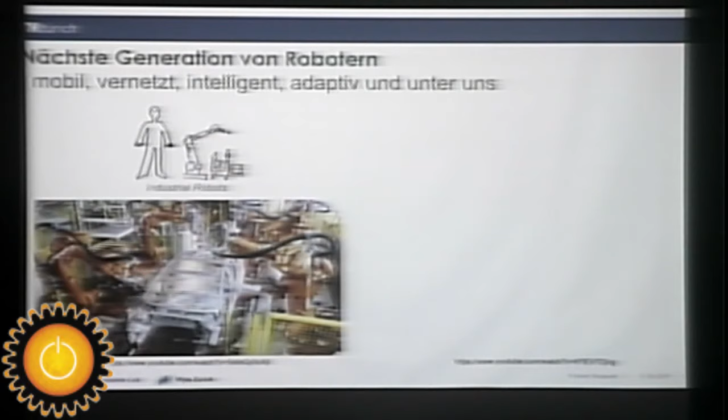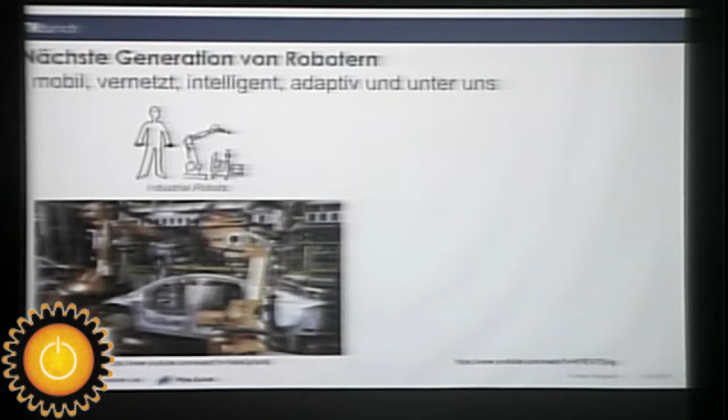So let me first start with a little bit of a historical view. Robots have been around for quite a while. You probably all know the robots which are producing our cars. About 400,000 are installed every year in factories, a lot in car factories, but all other factories too. Meanwhile, about 30% of these robots are installed in China. And they're not installed in China because labor is extremely expensive in China, but because they are much more reliable, much more precise for these types of tasks.

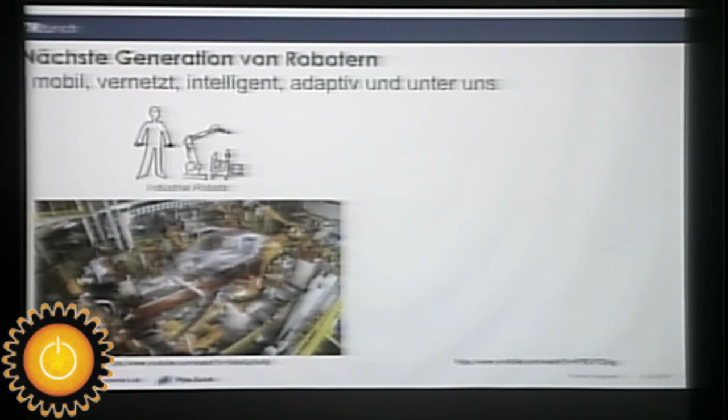Now, you might then ask, why do we not have robots around us? Because there are also some tasks which are not fun to do. But if you look here, these robots are in an environment which is very structured, very precise. It has no humans around, and for this type of task, robots are perfect. But the next type of robots, and these are the robots I will talk about, is this type of robot, which hopefully at one point will clean up our kitchen. But I have to tell you that it's probably not tomorrow. It will take a while.

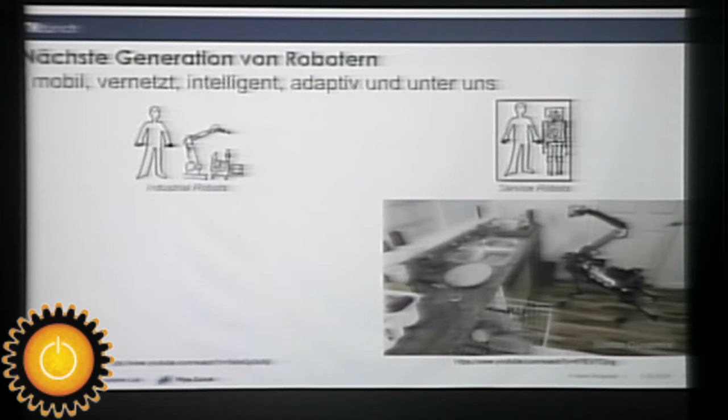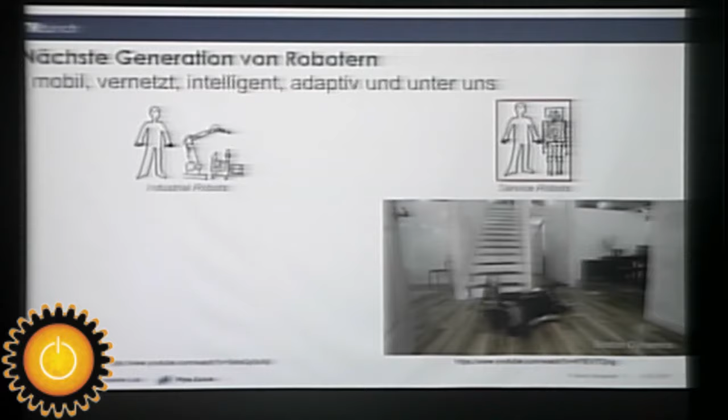Even if this video from Boston Dynamics, which was on YouTube, and probably a lot of you have seen it, looks like we can soon buy this robot, this robot was teleoperated. It was precisely pre-programmed. There is no way today that we have a robot which can really enter a building, and you give it a task, clean up the kitchen, and it will do it. What these robots can do today, of course, is autonomously move around. They can go upstairs, they can get back on their legs, but still they have a lot of limitations.

Now why is it so difficult? It looks like the tasks which are difficult for us, like precisely soldering something or assembling something in a car, are easy for robots. And on the other side, jobs which are easy for us are very difficult for robots. Here's another example of a robot doing some work in a somewhat homemade environment. The video is sped up 50 times. So even at 50 times faster, it doesn't look so fast.

Why is it difficult? Our daily environment is very complex, very diverse, with a lot of surprises. And robots today cannot really deal with surprises. These robots have to deal with uncertainties in their perception, a lot of errors, a lot of noise. They have to deal with partially available information, so that you see only a part of a person's body, for example. They have not only to understand and see the environment, they also have to be able to feel the environment. And this is probably the most lacking sensor. Today's robots have no tactile sensing. We can handle objects very easily because we have a very tactile hand. Robots cannot do this. Even though there has been a lot of research, the progress is very slow on this end.

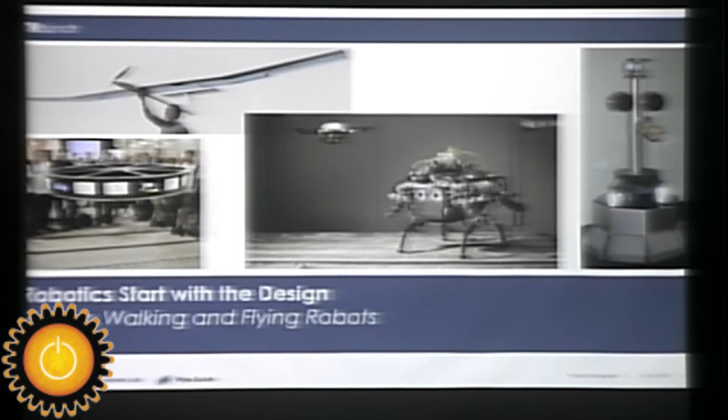So I would like to go through more or less two elements. First, I will speak about designing robots with different examples from our lab. And then I will go over to navigation, how we can actually have robots know where they are so that they can move around in their environment. So let me first start with some example of designing robots. And I would like to start with student projects.

I'm really extremely excited to see so many young people which are really excited about robotics. And we have also a lot of students which are designing robots. And these are two examples. We have much more wonderful examples of students which did in the last year of the bachelor studies a project in a team, typically about 8 to 10 students.

And in this team, they pose a vision themselves. Sometimes we propose something, and then they develop the whole system from scratch up to a functional prototype within 1 year. This is a choice the students can take. They can have a little bit less lectures, and they do more project-based learning. And we have a lot of very interesting collaborations.

We have, for example, collaborations with Disney. Disney has a research center at the campus in Zurich. And so Disney has a lot of different places like Disneyland, it has films and so on, but they have also resorts. They have hotels on the beach. And they came up with the idea, can we build a robot which can actually make drawings on the beach so that people are really excited in the morning if they look towards the beach.

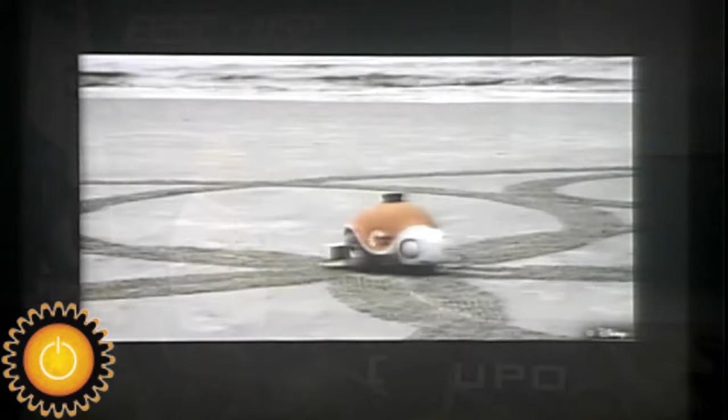And so the students started to build a robot which can actually scratch into the sand. They had to build the entire system, and then they had to actually design the whole navigation, localization so that the robot knows where it is, then also the whole planning. And here, this localization is done by these pillars, which you can just put in as reflectors, which are seen by the laser which is on board the robot.

And then the robot can take an image and then automatically calculates the best trajectory so it doesn't cross too much over its own drawing. And at the end, it can really draw elements, which is probably not extremely complex, but it's really not easy. I think the students learn a lot on one side, and on the other side it's something which is very difficult for humans because robots can move very precisely.

Another task we gave the students: today, with car-like robots with wheels, we can in principle only go on flat ground. If there are little steps, it's already difficult. If big steps, no way. Now the question was, can we actually build a wheeled system which can not only go on ground, but also on the walls and probably on the ceiling?

So what the students built is this little robot, which is probably about 50 centimeters long, which you can see here, which is like a car, has 2 wheels in the back, fixed, and then 2 wheels steered in the front. But these wheels are not actuated, no motors on the wheels. But then they added components from flying robots, so it's 2 propellers. You can see 1 and 2. And these propellers can be tilted in 2 directions.

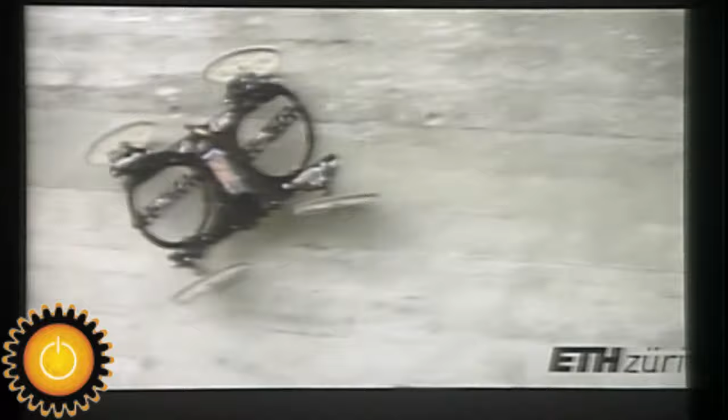And if you put this nicely together, what the students did, you end up with a robot which is on flat ground. There's a wall coming. It just changes the propellers appropriately, and then it continues as it would on the ground. Of course, here you cannot hear the sound.

Of course it's loud. It's like a helicopter. So it's a lot of noise, but it can easily go on walls. This is a student project which was not defined for a specific task. It's just to see, can we drive on walls? Which students showed is possible, and very often then all of a sudden people came.

The civil engineers came to us and said, can we have these robots? We want to do measurements on bridges. And we did some projects in this direction, but later on, we will come back on this, we decided to go with flying robots without wheels towards bridges.

Now, another field where, as an engineer, I think you have to be excited about walking and the mechanism how dogs or humans can walk. And walking, of course, is extremely agile. You can go upstairs, you can go in the mountains, you can go in very rough terrain. And if you see in nature, humans, but also a dog, and this is a jumpy dog, where you can find YouTube videos of this jumpy dog, it's amazing how dynamic, how agile they can walk around or make big jumps.

And so as engineers, we ask ourselves the question in research, can we do something similar? And of course, the first thing you have to try to understand is why nature, humans and animals are so good in jumping and so on. And there is one secret or one element behind it, which is that we are elastic. So we have muscles and tendons, and the tendons are like springs. And this helps a lot, and this can also be done technically.

And what we did is implement this in a motor, which looks like a motor, but it has first a motor, then an encoder, then a spring, a torsional spring in this case, then a second encoder. We have two encoders because then we can measure the deformation of the spring, and then we have the output. And of course there is a reduction gear. In this motor we have a reduction of about 1 to 50.

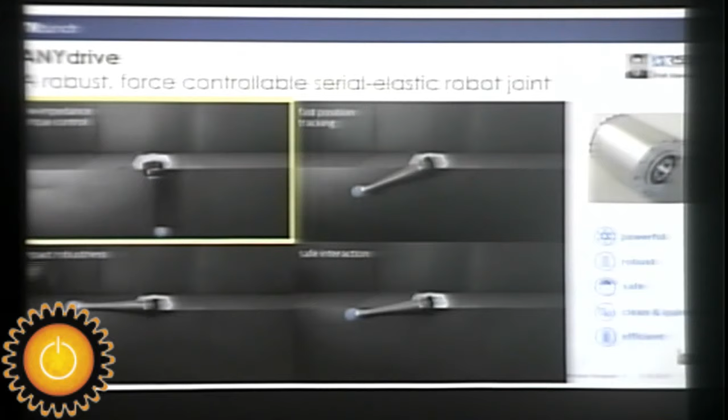And this reduction means that, in principle, if you would like to turn the motor back from the arm, it's really hard to turn it. But because we have a precise measurement and this compliance, we have a system which all of a sudden behaves nearly like a human arm. So first of all, you can see here, because we have a very precise force measurement, the motor behaves like a free pendulum, even with a very strong reduction gear, because you are measuring the force and controlling it to zero torque.

Then the second thing is that, I have to start the video again. Oh, doesn't work. Sorry.

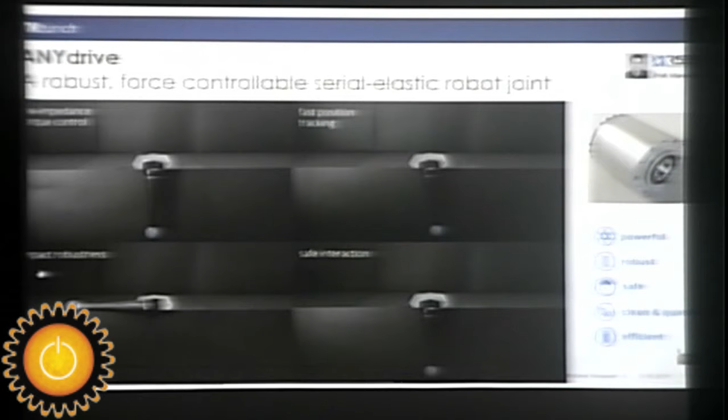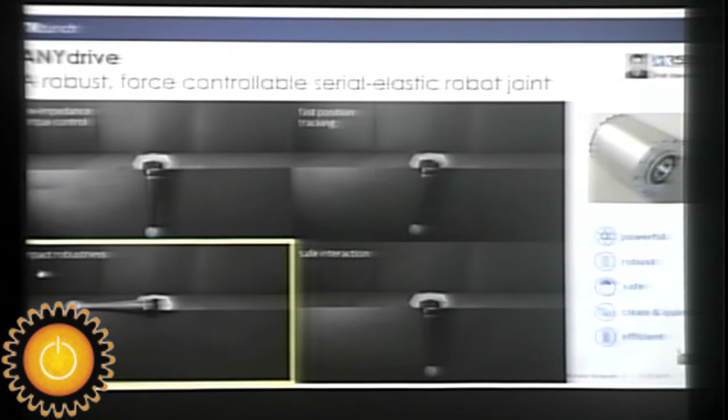So the second element you see, because you have the spring, you can actually hammer on the element, and the gearbox is not destroyed, which would be destroyed if you had no spring in between. Then you can also have safe interaction.

So if a human with your head is interacting with the robot, it will automatically stop. It has a very precise measurement. The spring is already damping or reducing the impact force, so it's really a safe system. And you still can have very precise position tracking, you can still go to a very precise position.

Now, these motors can be used for robot arms, or they can be used for walking robots. If you have, for example, one leg of a walking robot, you can see again, these are motors with high reduction gear, but they behave like zero torque, because you can precisely control the torque.

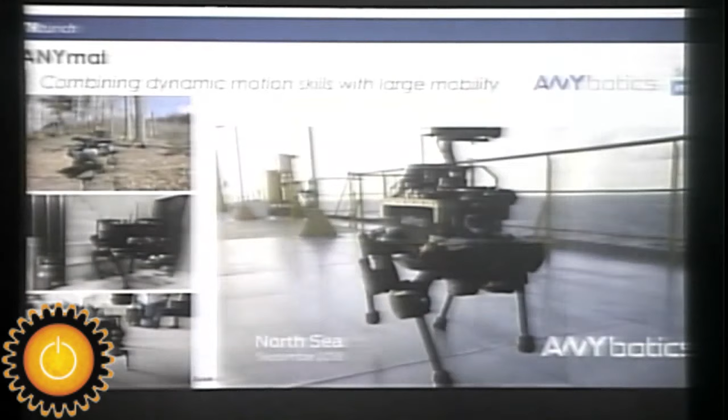Now if you equip a walking robot with four legs, and each leg has 3 motors of this type, you have enough degrees of freedom to move around. You can then very adaptively move around in the terrain, because the legs are compliant, so you adapt to the terrain.

You can also go upstairs and always feel how you're interacting, and even do jumps. This robot is not optimized for jumps—you've probably seen similar robots from Boston Dynamics. You can, of course, optimize the spring so that you can do very high jumps.

This robot was optimized to really do inspection, for example, of environments. Here's an example where the robot is on an oil and gas platform out on the ocean, and the task of this robot is to go and do inspections with its onboard camera.

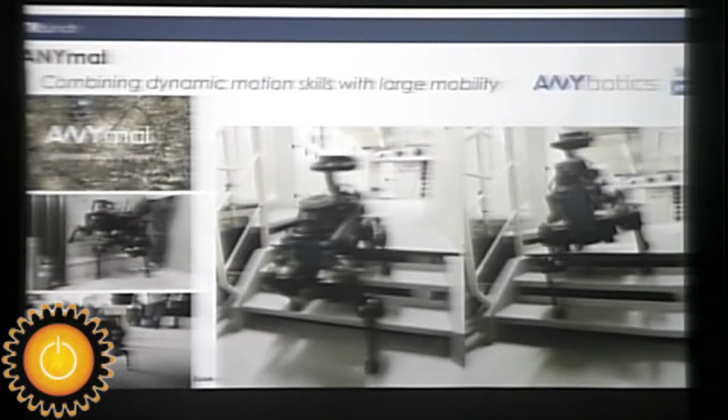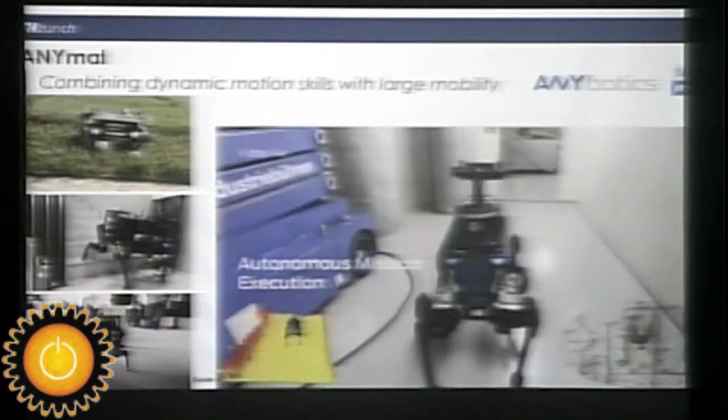A wheeled robot would be limited here because there are stairs and so on. This robot can really move in any environment, adapt to the situation, and do the inspection and create a 3D map of the environment, for example. So these types of robots have a new application field, because they can reach areas where you cannot reach with regular wheeled robots or something similar.

These robots can also fall down, as we saw in the first video. Now the question is, can the robot learn to get back on its legs? Falling down can happen in all different situations—sometimes you're on the back, sometimes on the side, and so on. It's very difficult to actually control and model all the different situations and always find a good trajectory so that the robot can get back on its legs.

Here, machine learning can do a good job. If you have a good model of the robot, you can learn to get back on the feet from all different kinds of situations. Of course, you could do this using a robot, or 100 robots, and put them in different situations, and it learns—if it gets on its feet, it's a positive reward, otherwise a negative reward. But you can imagine you will damage the robot, and it will take forever.

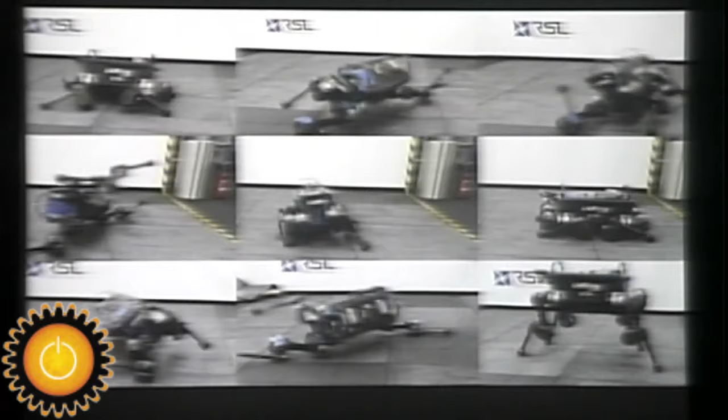But if you have a good model, you can do this in simulation. In simulation, you can have 1,000 robots in parallel falling from random directions, and that's what we did. We had robots learn to get on their feet again—all positive movements were reinforced positively, and others negatively. Then we could directly use this controller on the real robot, and the result is quite impressive: in very weird situations, the robot reliably gets back on its legs.

So the robot learned to get back up, because even if you can model very precisely the motion of the legs, you cannot so easily model all the different situations the robot can end up in its environment. So I will focus now on the next step, the design of flying systems.

This is the biggest part we've been working on for quite a while. About 20 years ago, we first wanted to make smaller and smaller robots. At one point we realized that the smaller you get, the more difficult it gets to move around obstacles—if you're a small robot, even a little stone is a huge obstacle. If you look at nature, it's the same.

The smaller animals get, the more likely they will fly, because they're always also limited. So we started then to think about how we can fly, and it happened to be a good moment.

These quadrotors or multicopters, you probably all know, and some of you have one at home, made a big boost in the last probably 10 years. But it only appeared about 15 years ago. So why was this all of a sudden possible?

It was possible because on one side we have this little device, which is an IMU, an inertial measurement unit, which measures the rotational speed and acceleration in all directions. And you need this to control a quadrotor, otherwise it's highly unstable. And you need good motors, ideally brushless motors which can really go and control very fast.

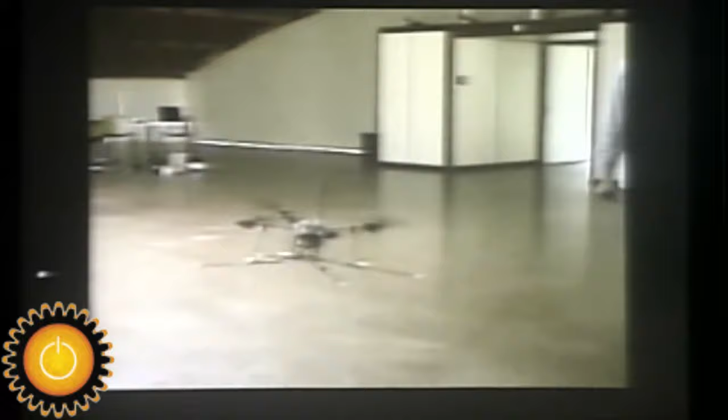We started actually with this about 2003, and in 2004 we were the first time able to really have one of these quadrotors stable in the air. The idea of this concept was around before. We just had the luck that we had the right sensors together, and later on we realized that I think it was the first quadrotor flying in the air, 2004. Today it's some of the gadgets you can buy for even starting with $15, $20.

Quadrotors, or everything which is rotary wing, is somewhat limited in flight time because the efficiency of a helicopter is very low—probably about 10 times lower than fixed wing. So we started to think about if you want to do other tasks than only probably hovering and taking a couple of pictures, we should probably have fixed wing.

Then we came up with the idea, how long can we fly with fixed wing? Especially outside, you have sun. And so we realized that it's in principle feasible to fly continuously for multiple days if you use the wings as solar power cells also, and then you store energy in the battery.

In 2008, we were able to show the first time that we can fly more than 24 hours with an airplane which is only about 3 meters wingspan, 3 kilograms in weight total, or even less, and half of it is batteries. We were very excited, and so we moved on, and I will show you a little bit more on details of what the newer airplane was.

Another way to fly much longer is to have an aerial vehicle which is lighter than air, a balloon. Of course balloons are typically not so easy to control, so our students developed a balloon which is a combination between a balloon and somewhat like a quadrotor. They attached 4 propellers on all the sides, and with these propellers they can really control them in all directions. The nice advantage of balloons is that you can actually fly over people without taking the risk that if something fails it falls on their heads.

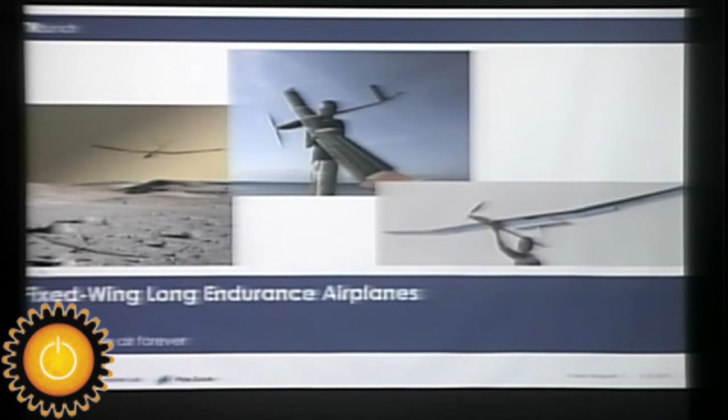What we first have to understand is that the scaling of airplanes has some very special effects. If you build a big airplane, you have to be concerned about the structural mechanics, because the loading of the wings is the limiting factor in principle. For a small flying system, the structural loading is not a big issue, but the aerodynamics gets difficult, because the smaller you scale, typically aerodynamics gets worse.

This is actually the same in nature. Here is a graph showing man-made systems like airplanes and birds. There is a line which represents the wing load versus the weight, showing how the wing load changes with the weight. You can do a linearization, and this is the equation, which shows that the wing load really gets worse and worse the heavier you get.

So if you want to build big airplanes, you have to worry about the big wing load, and for smaller airplanes, you have to worry about the aerodynamics. If you want to build an airplane which can fly forever, on one side you have the total mass, composed of the structure, which you can influence — if you build it as light as possible, you get lower mass.

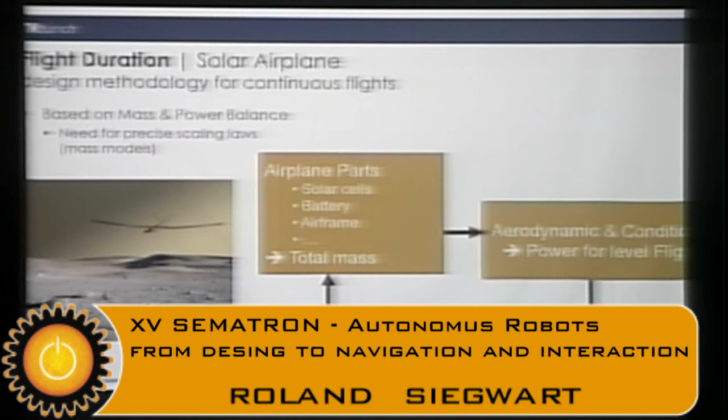Then you have the battery and also the solar cells, and on the other side you have the aerodynamics, which defines the force you can generate to lift this mass. You have to optimize, and you get all the different scaling laws. What we looked at is what really happens if you get smaller, because we wanted a very small solar airplane.

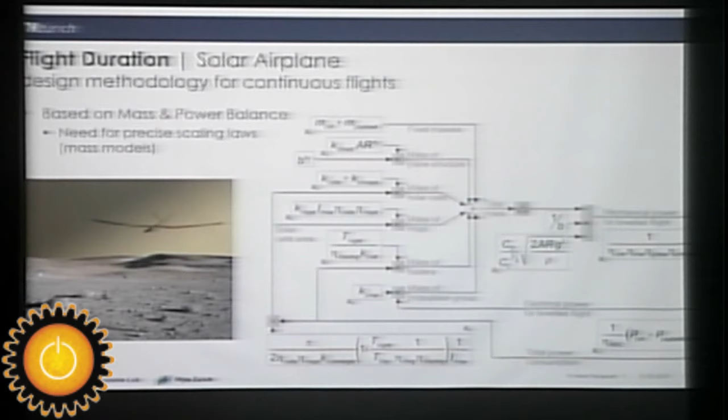With all this, you can have the scaling law for different elements. With batteries, it's easy — it's linear with the size or weight of the battery. For the structural loading, it's a little bit different, so it's not linear in total. If you plug in these equations, you come up with a drawing that can be represented like this.

On one side you have the battery mass, on the other side the wingspan, and here you have the excess time, which is the time you can fly more than 24 hours in principle. This means, with a sunny day in the summer in Switzerland, it will be different in the winter.

In the best sunny condition, you can have, for example, an excess time of 15 hours. This would mean, in principle, you can fly a whole day without any sun and still continue over the night. If you have a bigger wingspan, you get a bit more excess time, and if you have more battery, you get more excess time. But with even more battery, it becomes an extra load, and the excess time reduces again, so you have a flat optimum at a higher size.

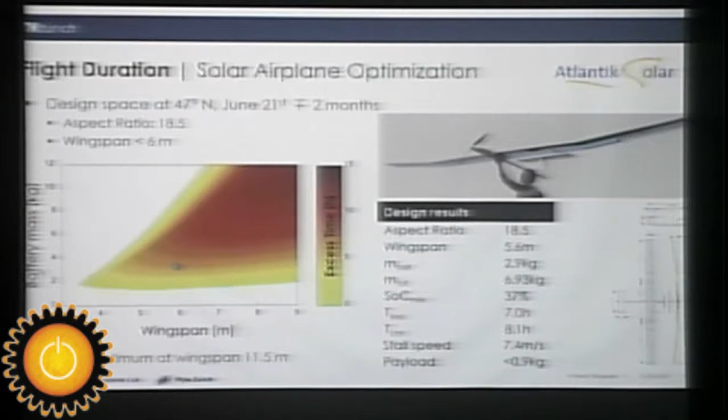But we wanted something small, so we selected to go with something like 6 kg. The selection is based on the idea that we want a hand launch, so somebody can really launch it. In the end, we had a system designed and optimized at about 6.5 or 7 kilograms weight, with nearly 6 meters wingspan, and half of the weight is actually batteries — mainly batteries and then the structure.

Then, of course, you have overnight flight. During the night, we had lights on so that people could see it. This flight was, on principle, fully autonomous, but we always had backup people.

Then we had the idea to fly at least about 3 days. We could have continued, but it's tiring for the people watching the airplane all the time.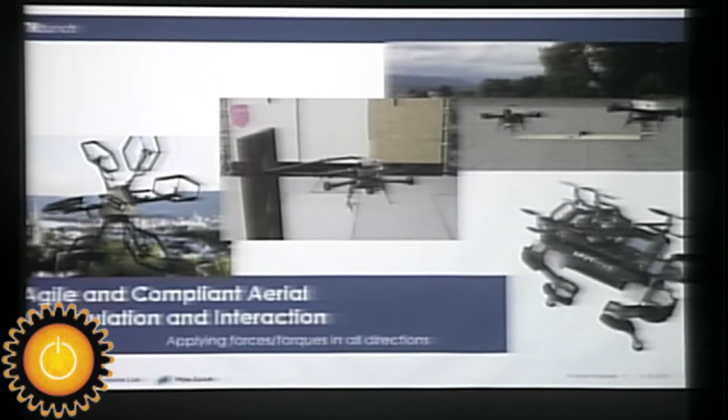In the second part, I'd like to focus on the agility of flying robots, and this is not with fixed wing but with rotary wing. With this quadrotor, compared to the standard helicopter with one main rotor and a tail rotor, you have much more agility, but it's much more unstable. You have to control it constantly, but you can fly very dynamically.

Once you have dynamics, the next step is, can we actually interact with the environment? Can we have a robot arm there and touch something? So we did some work to add a simple robot arm with 2 degrees of freedom, which is also a compliant arm with an elastic element. The PhD student who developed this, Mina, can really touch the flying robot, and it feels like you are in contact with it, and it will go back.

And the other way around, you can go to a wall or grab something and really feel what's going on. But you can still see that for the helicopter to come back, it has to tilt. So it's somewhat not ideal, because today's quadrotors or multicopters typically have all the propellers in the same plane.

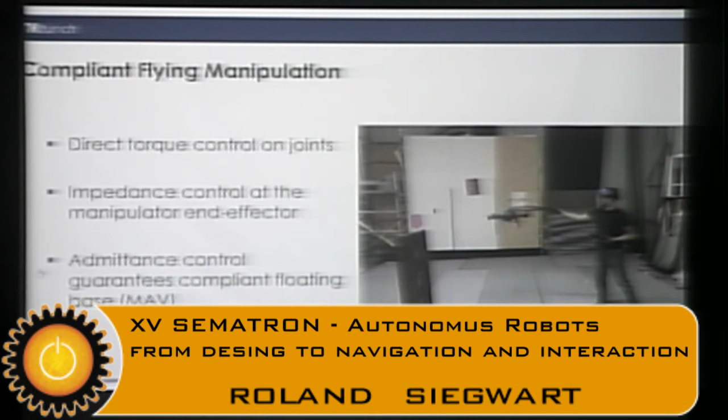A second limitation of these flying vehicles is payload, and it's very difficult to increase that much. But what you can do is have multiple helicopters working together. It's the same as what we do as humans—if you want to carry a table around, you ask a friend; somebody guides and walks, and the other one just follows.

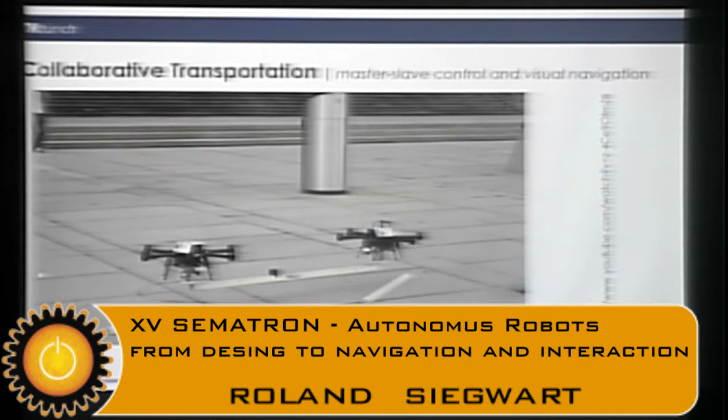You can do this with helicopters too, where one is the guide robot with fully autonomous flight capability, knowing where it is, and the other is just carried behind. The other one only needs to know at what height to fly, and the rest is done by the force from the first robot.

Flying platforms have nice features not shared by wheeled robots on the ground, because on the ground you have resistance, but flying in the air, in principle, you have no resistance. But still, if you want to move forward, you have to tilt the system, which can cause problems, probably with connectors.

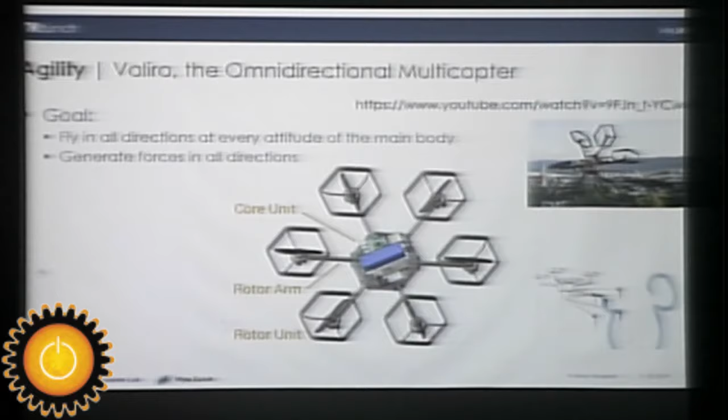So this was not enough, and we went on to think about whether we could have flying platforms that really fly in all directions. These multicopters typically only have 4 degrees of freedom you can freely choose: X, Y, Z, and rotation around the central axis. But in order to move forward, they have to tilt—they cannot move forward without tilting—and so they also cannot easily control and generate forces in all directions.

So the students sat together and said, what can we do about this? Actually the solution is pretty simple. You have, in this case, 6 propellers, connected to a bar which you can turn, so you can turn the propeller.

And so all of a sudden you have, in this case, 6 propellers and 6 rotations, so you have 12 actuation degrees of freedom, and in space you have 6 degrees of freedom. So you have a highly overactuated system. So you're really doing the opposite: all of a sudden you have not an underactuated system, and you have a lot of potential.

Then you have more a problem that you have to find a mapping from your required force and torque. So typically you calculate, depending on the motion or the speed you would generate, a thrust force and a rotational force. And now you have to map this to the forces and the orientation of the arms. And this is then not so easy, because you're overactuated. There are multiple solutions, infinite solutions.

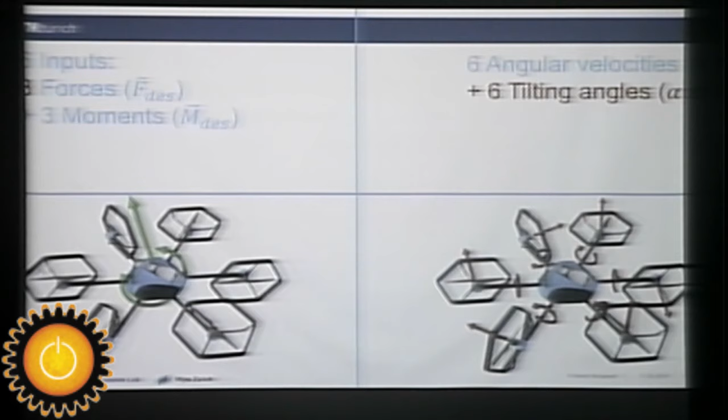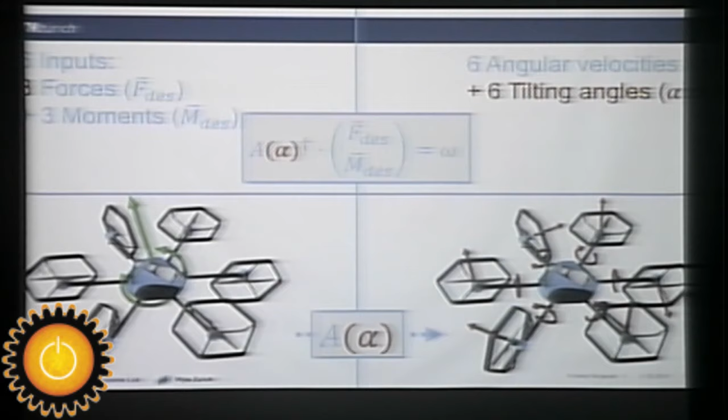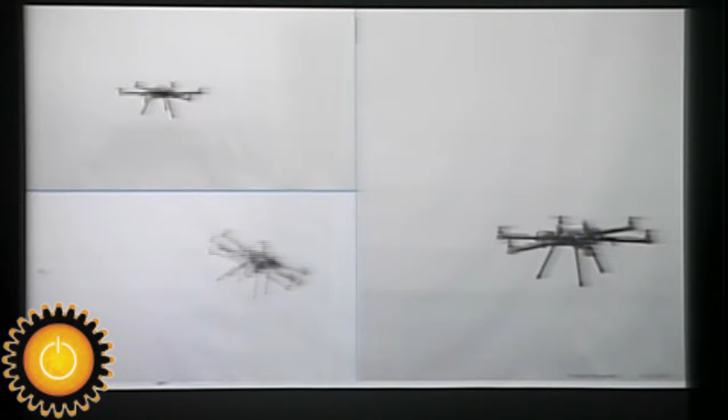But the students found a way to make a mapping which seems to work pretty easily. And once you apply this, all of a sudden you have a system which can not only fly in a plane and tilt when it moves forward, but it can fly in all directions. Which means also that you can generate forces in all directions. So in principle you can be like this and generate a force against the wall, or be like this and generate the force against the wall.

Now, of course, it's probably academically nice, but what can you do with this? Once you want to fly not only in free space but also in interaction, for example doing something on a wall, then this is extremely helpful, because with other robots you cannot do this. And here you can see an example of what you can do with such a system.

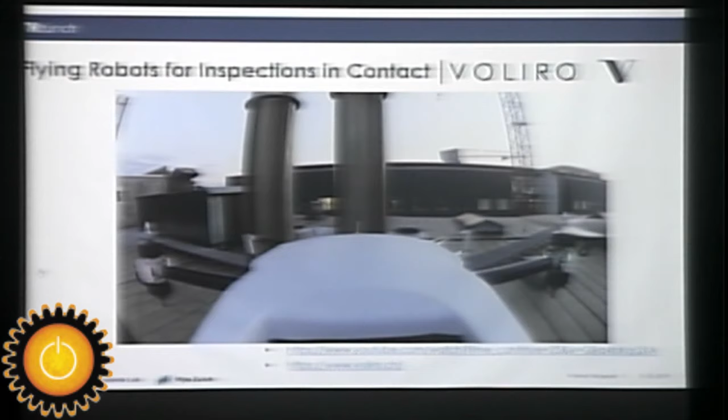This is not a symmetric system as we have seen before, but it has two propellers in the front, which you can see here and here, which can be rotated in both directions. And there is a smaller tail propeller. And with this system, you can also fly in somewhat all directions, and then you can go in contact.

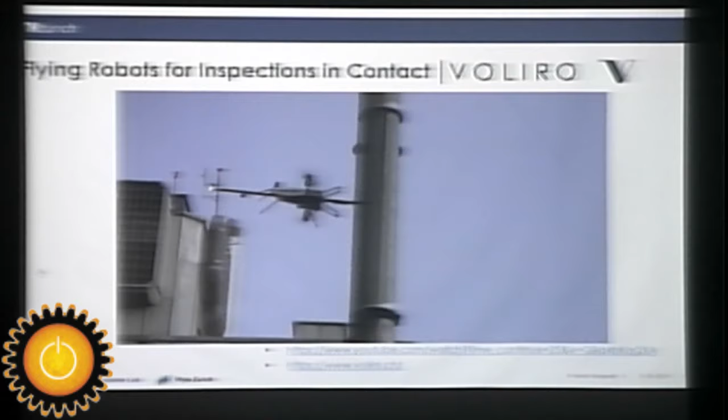And we already have some very interested people who want to do measurements on their infrastructure, to go and make contact. For example, for wind turbines, they want to measure the propellers so that they're still safe. And so you can go and get in touch. You can go straight, and this you can more or less also do with a standard helicopter.

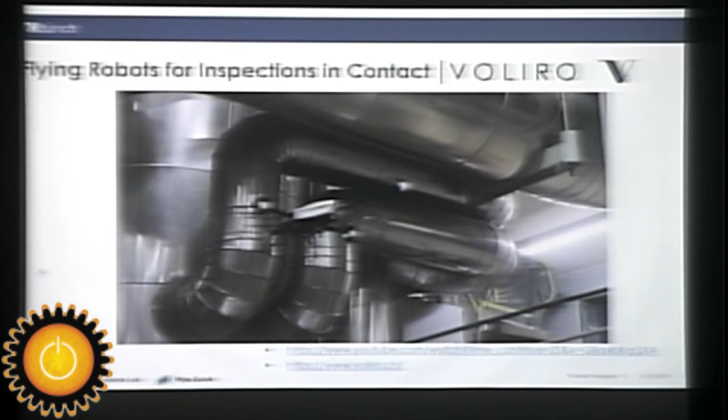But at one point you probably want to measure also against the ceiling, and you can see you can just rotate and then you measure against the ceiling. And something we did more recently is we actually just put a drill on

3D dense reconstruction, because you have to do collision avoidance. So you need not only points where you can localize, but you need to know that there is a wall, and then you need planning. And all these tasks are pretty calculation intensive. For flying robots, you have to do this on board in real time, which is not so easy.

And you can see here what a typical system in our lab has today. You have the first sensor unit with an IMU, which is mainly for the control of the attitude of the system. This is more or less the lowest level. We then have a visual inertial sensor, which is a camera and an IMU, inertial measurement unit, together. Then we sometimes also have depth cameras or thermal cameras.

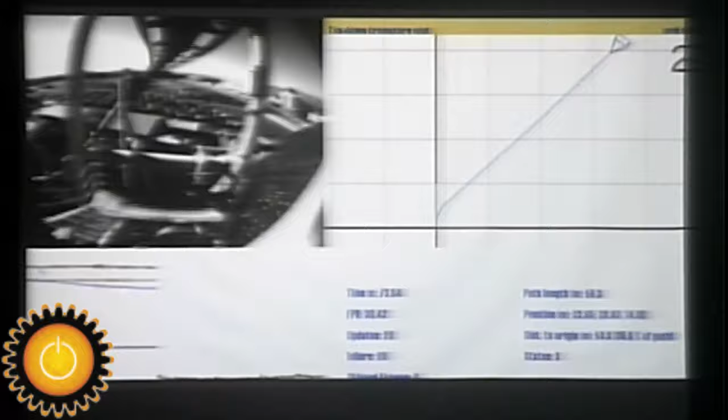And then you can actually, on board a system, track these points. You can see the colored points are the tracked points in the image. This is the measurement of the signal of the IMU. Now this is on a roller coaster, where my PhD student went on a roller coaster with the smartphone. And then you can see as soon as you move really around, the accelerations are big, rotational speed also.

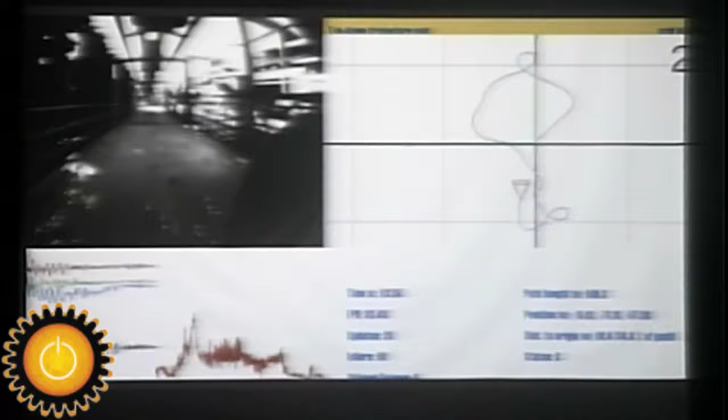And what is interesting here, this is the smartphone actually doing a motion estimation in real time on board. So it knows exactly how it's moving in 3D space on this roller coaster. And this is exactly also what we need for flying robots. They have to know where they are and how they move around. So the tracking is first a motion estimation.

Now once you put these points in a map, then you can build up a map, and then you have a localization. And then if you drift a little bit away, but at the end you are coming back to the same place, you can correct this. And then you have a somewhat consistent 3D localization.

For doing this, you need, of course, the appropriate hardware. As I mentioned, on one side you need a camera, on the other side you need the IMU, and you have to integrate them considering all the uncertainties. And typically it's either a Kalman filter or an optimization problem you are solving, where you're plugging in the landmarks, the measurements for the landmarks and the tracking, and on the other side also the IMU. The IMU is faster, so you can actually have more entries.

But if you want to bring this together and solve this optimization problem, you have to have very precise time stamping. You have to know exactly when it was taken, because you are in movement. If you don't know exactly when the image was taken, you introduce errors. This was not so easy to find on the market, so we had to develop our own camera. Today there are some systems which have this integrated, with very precise time stamping. So we know exactly when the images and the IMU measurements are taken, and thanks to this you can be extremely precise.

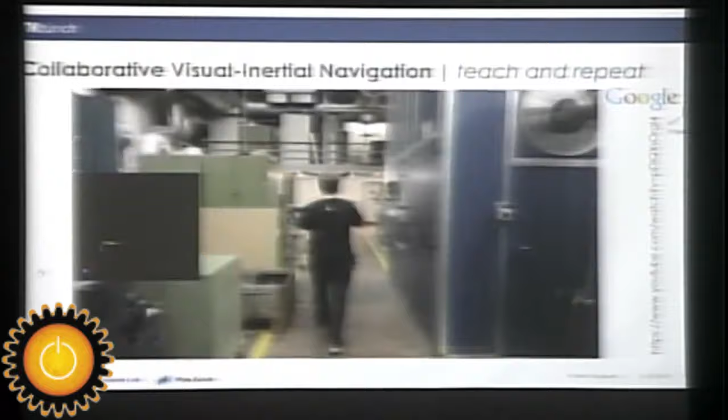What you can probably do a little bit more realistically is this. You go with a tablet and you have an inspection task. You have to go to an environment like a building where you have to take measurements in an industrial setting. So the person, here my PhD student, who is demonstrating this, goes from one station to the next.

This is a tablet, and the tablet is building up a map, and is then precisely estimating the motion. So the blue points are the points where measurements are taken. The red line is the motion. And in parallel, it's actually collecting these features, which we have seen before, which are sticking out, which allows them to make a map. So this is then the map.

Green line is the trajectory of the motion. The yellow points are the features, which is the map for the robot. It's more difficult for us to read it, but for a robot, this is the easy way to do. And then we give the same map to a helicopter. The helicopter has also a camera and also an IMU, more or less the same sensors.

And you can directly use the same map for doing exactly the same job the day after, where you don't have to really do something to control, so it's just doing exactly the same thing based on the same localization. Now, localization is not enough. As I mentioned, you have to also build up then a map and bring multiple maps together.

And we have here a pipeline which is actually even available open source, where we have first local map creation, and then we can even fuse multiple maps. Local map creation, first of all, you need a motion estimation, which is here done a little bit differently. We have used only simple patches, and these patches allow us to track them from one image to the other. Tracking of patches is very fast and very reliable, and you can go very fast with this system.

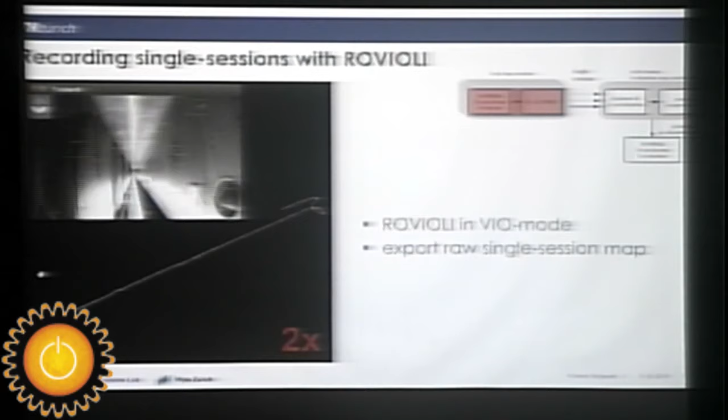Then, in parallel, you are actually collecting, again, these features, which allows you to build up a map. And then you have, for example, multiple robots, or multiple humans, which are moving around. They're building maps from different corridors, or for different levels. And then you have to bring these maps together. And so you have then different submaps, and at one point you have to fuse this map, so that you can build a consistent map.

All these maps will drift a little bit away, but here you first close the loops, and then you jointly optimize all the maps together. So you find the features which are overlapping from one map to the other, and then you align them. And at the end, you have a map which is typically in the order of magnitude of 1-2 centimeters precision. You can even push it further, which allows then for all the other systems to localize in this map.

Now, the next step is actually to do this 3D dense reconstruction, which is not so easy with cameras. If you have a laser sensor, you have directly depth information. With the camera, sometimes you're missing some information. It's not so easy to get this information. But if you have multiple images, you can actually build up a map.

So you actually have a camera, and then you're always trying to find a point, which is the point which is the closest object you see in the camera. And then you bring this together, and if you have multiple of these images, you can actually verify this point and have it from different points of view.

Then we are putting these points in a voxel grid, actually a 3-dimensional grid. And for each grid cell, you can actually calculate, how often has this been seen? How certain are you that there is a point there? And then with this, you build a 3D map of the environment. And you can see here how this works, and this again is online in real time on the helicopter.

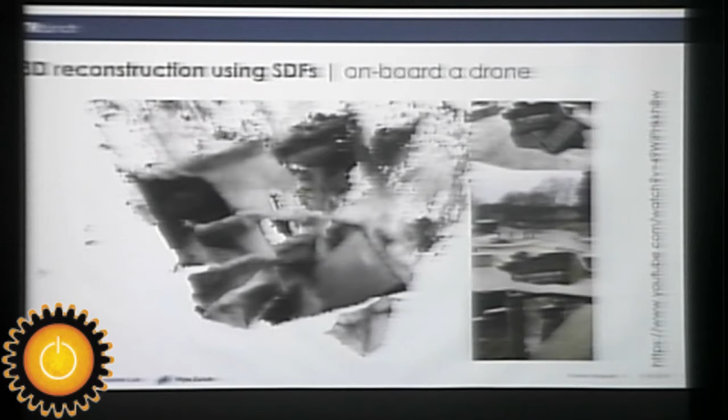And you can easily imagine that this map is actually good enough, so that the helicopter can fly by itself, can see walls, can see where there is an opening, and where it can fly in and do its inspection task, for example. The last thing you have to do is actually to find a trajectory in this environment, which is also not so easy. And typically there we have 2 levels. One is the global. So if you have a map of the environment, you can actually optimize and find the shortest path or the best path.

But very often you don't have a map beforehand. So you have to have different levels. So typically for the global planning, one approach is this rapidly exploring random trees, where you try randomly, more or less, different connections, and then you try to get better and better. So you just try. And this allows you to have at least very fast a solution, but you never know exactly if you have the best path until the end, if you have found all.

But on the other side, this is typically a graph which has not a smooth trajectory, so you are then smoothing the whole trajectory. But once you are smoothing, there is a risk that you're colliding with the environment again, because all of a sudden you're cutting around the corner, and then you have to optimize locally. And this is actually how this looks like.

Imagine that with this RRT star, you find eventually this as the shortest path. You have a lot of other solutions, but this is then the best solution currently. But it has a lot of corners, and you don't want to fly like this. So you are smoothing it out. But if you are smoothing, sometimes you have overshoot, and all of a sudden there is a risk that you're colliding with the environment. So as a next step, you actually have to locally optimize this system. And eventually, if you do this, you have then an ideal and very fast movement in this environment.

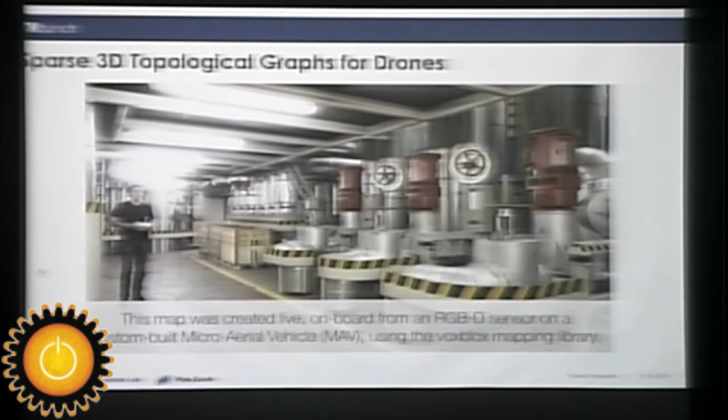And so this allows you then to have a flying platform which is able to localize, to build its own map, to build a dense map, and then in this dense map actually build also a 3D trajectory and find the best paths in the environment. For example, you can then also color it and say which is the best, the less risky environment, and where you can actually go faster, because you have enough space available from the distance to the environment. So with this, I'm smoothly coming already to the end.

So I tried once to think about how can we define the complexity of robots. And in principle, there are probably 2 elements. I tried to put this in one graph and then put also the type of robots in this environment. On one side, you have the complexity of the environment. If you have a very structured environment, for example, for a car, a freeway is a very structured environment. It's a simple environment compared with a city where there's a lot of dynamics. Or in industry, typically you have a very structured environment. So this is this axis.

And the other axis is the type of interaction the robot should do. Robots which are only moving around, it's very simple, because they don't have to interact, they don't have to have tactile sensors. This is a simple slide. This is in this direction. And the most complex is if you have tactile interaction.

One example for a tactile interaction, imagine that you want to open a knot here with one hand. There is no way, I'm pretty sure, that in the next 20 years we will have a robot which can do this. You can imagine to build a special machine which does it once, but if you have different types of clothes, there is no way. And this we can do because we have such a tactile and good hand, and we have today robots which have very limited hands.

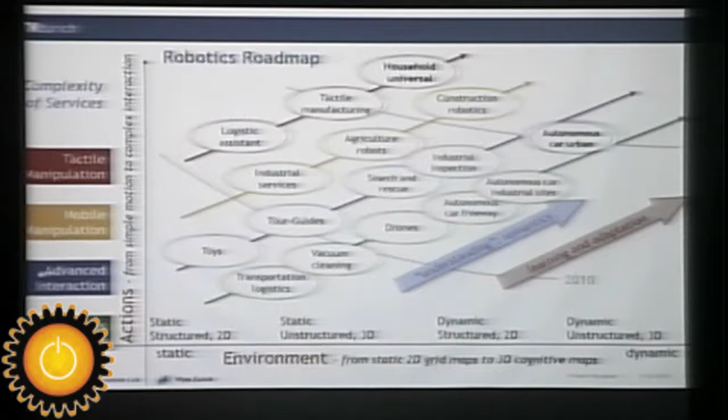Robots can do stuff better than we can do in some situations, and we can do stuff which robots cannot do. And in a way, we can say it's probably also a positive sign. We can use robots in environments where we don't want to work, in environments which are dangerous, and we will have probably a lot more fun and interesting jobs in the future, and the robots do the very bad jobs. Imagine that you would have to spray the cars which are built every day by hand.

This is not possible in principle—I don't think you can expose people to spray cars the whole day. Robots can do this. But on the other side, we have elements where the human, for example in caring about kids or helping in hospitals, I think there we need people who have the qualities to manipulate objects and have tactile interaction.

You can see here household—I still had the courage to put some timeline in. Here in 2010, autonomous cars are in principle solved today, I think, on freeways. I think it's not solved in the city. In the city, this is autonomous cars in urban environments. This is not exactly the green line, because then you have some sort of interaction—you have signs, you have a person probably showing go or go not, you have to watch other people. This is very important. It's not important on the freeway, but it's very important in a dense city environment. So there is still a lot to do.

I think one big element is that we have to have robots which understand the environment, and understanding is not so simple. There are a lot of people who think that now with deep learning we will understand everything. I have a lot of doubts, because we have already seen today deep learning needs a lot of data. It's very difficult to generalize, and it sometimes ends up with solutions which are optimized for something, and with a little bit of a different situation, it will totally fail.